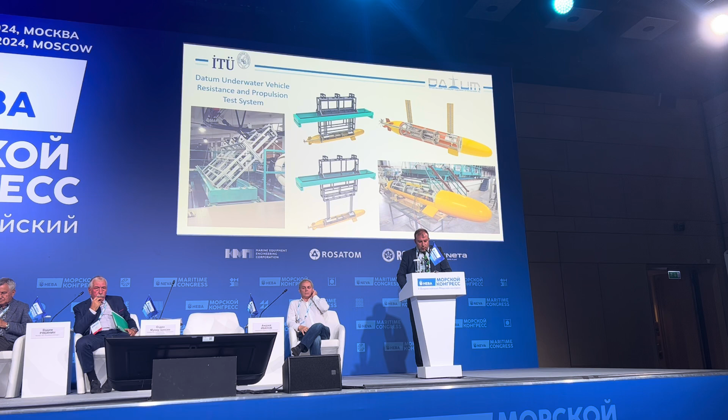One other system was actually our first underwater test system. It was for resistance and self-propulsion tests of underwater vehicles. So we built this for submerged body research, but only for the axial direction. So we measured only resistance and self-propulsion characteristics.

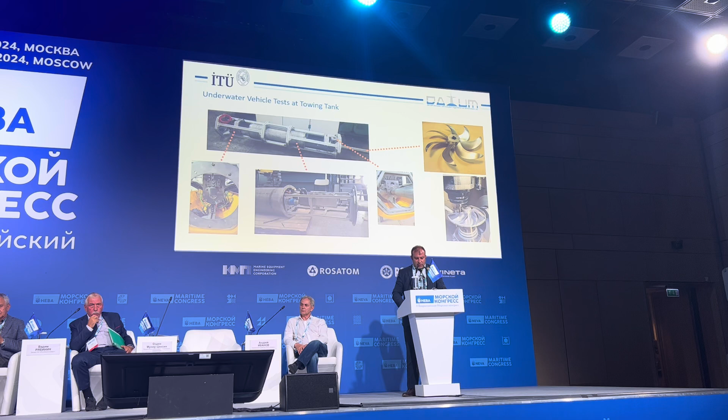This test was done on DARPA SUBOFF submarine model. We got some experience on this model, and it was also a part of a PhD study and was presented in Office of Naval Research conference in Hamburg.

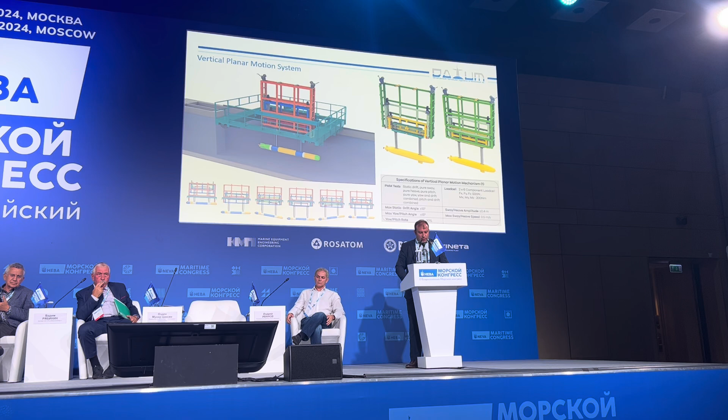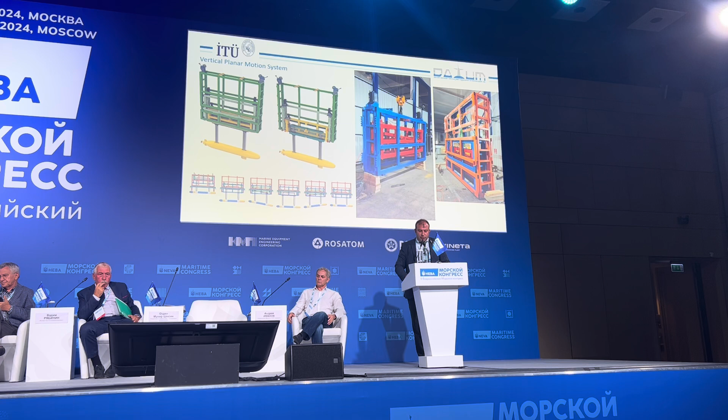University of Technology. And the following system was our vertical planar motion mechanism, which combined our knowledge on planar motion mechanism for surface ships and for submerged body research resistant project. So we manufactured it. It was funded by a defense company in Turkey, Roketsan.

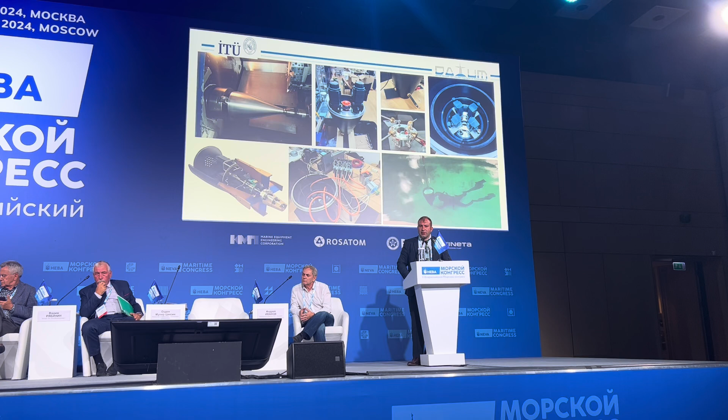So we built also the models, and the models has also their own propulsion systems and maneuvering systems inside. The system was assembled on our laboratory.

We can test models up to 5 meters and has a great amplitude for sway and heave motions. And for pitch motion, there is also up to 14 minus and plus 14 degrees of pitch motion available.

Two years ago, when I was first invited to this conference, this project was ongoing, and now it is finalized and in active service now. So it is the planar motion mechanism, but in the vertical direction.

Also, you generated your pump jet system also on model scale, and then to a commercial submarine and to nuclear submarines. So Russia is quite good at this free-running test technology.

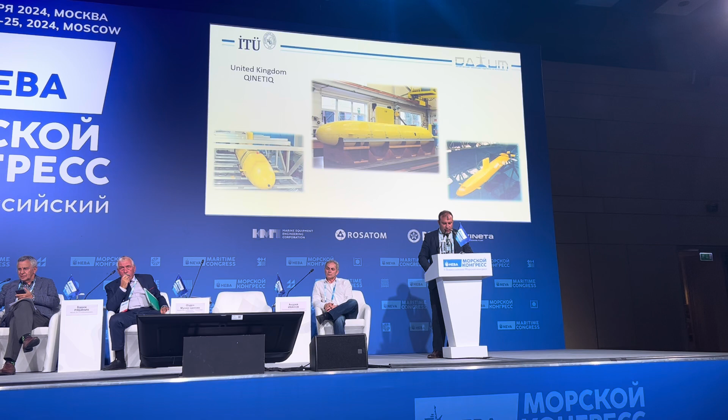In United Kingdom also there is a lab, QinetiQ laboratory. They are doing a lot of free running tests with them. Here you see the free running test of an Astute class nuclear attack submarine.

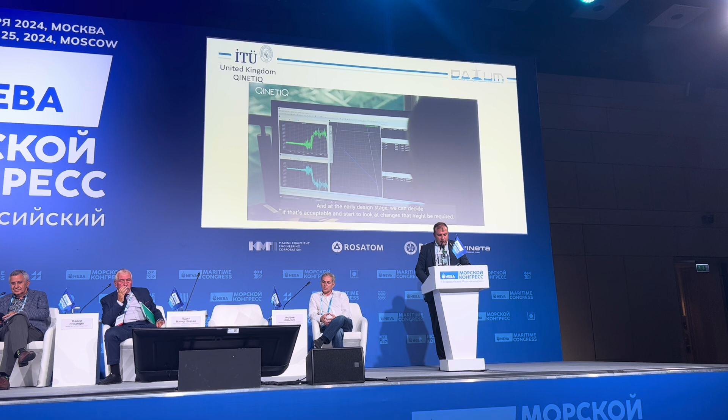As you can know, they need to check the maneuvering properties of a submarine, a newly designed submarine. So they also do have a vertical planar motion mechanism, but the design is finalized before the construction. They build these free-running models and do the tests with them. Here are the general arrangement of those systems.

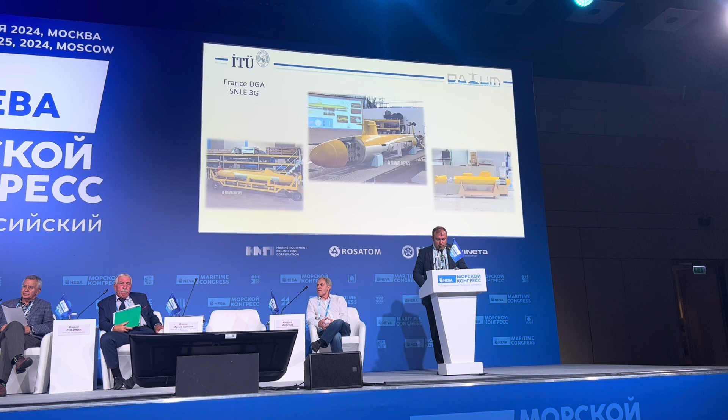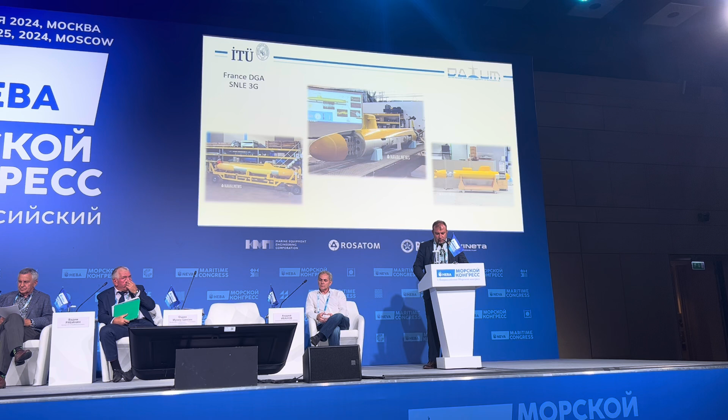France is also doing these tests in model scale, not very large as Russia and United States, but they are doing tests with around 4 to 5 meter models.

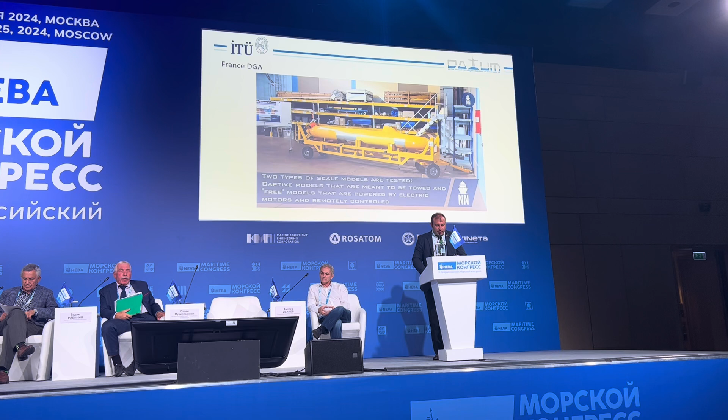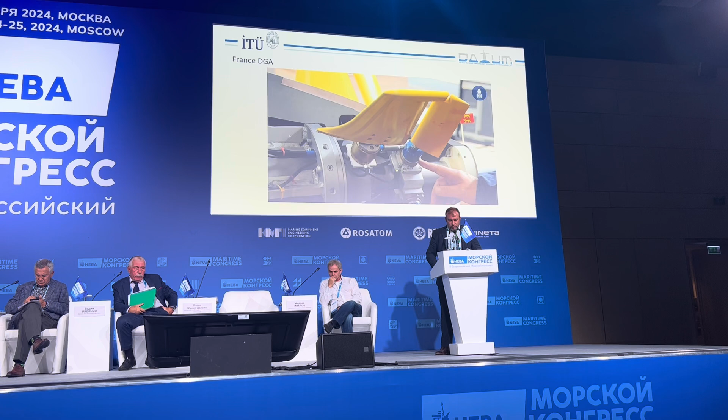Here is their third generation nuclear submarine, the test system of that submarine. System has of course the rudder servo drives to steer the boat, and also inside there are the sensors, a lot of sensors.

Holland is also doing such tests, even though they decided to buy their last submarine class from France. In MARIN, they are doing a lot of submarine tests, free running tests. This is a test of their Walrus class submarine. These submarines already exist, but I presume they are doing some auto pilot software developments. So in order to, before doing it on the full scale, they are working with the small scale models.

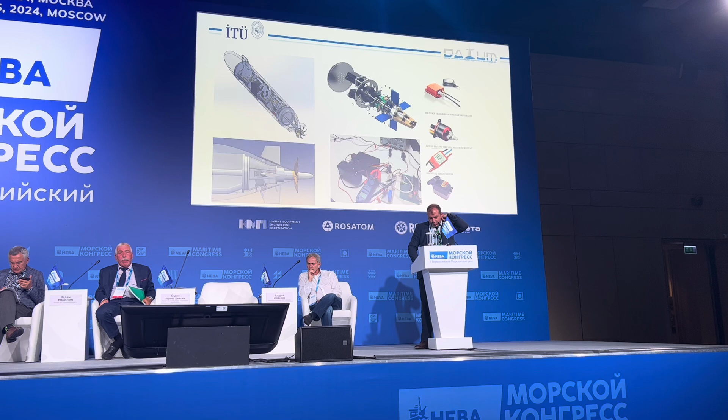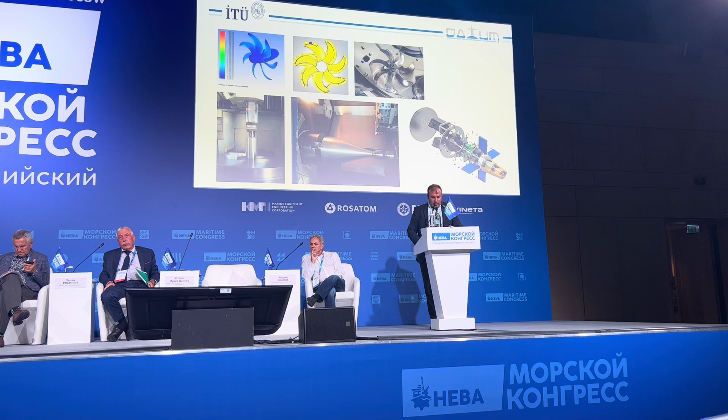And here are our studies. Actually, at first we didn't have much funding, and funded by ourselves. We did some efforts and built this DARPA SUBOFF model.

But now we are focusing on building larger and more with high quality sensors and equipments. Our aim is to produce the system for 214 class, which is the newest conventional submarine of Turkish Navy. We will do the test with them, and then we will continue with our indigenous submarine design, Milden.

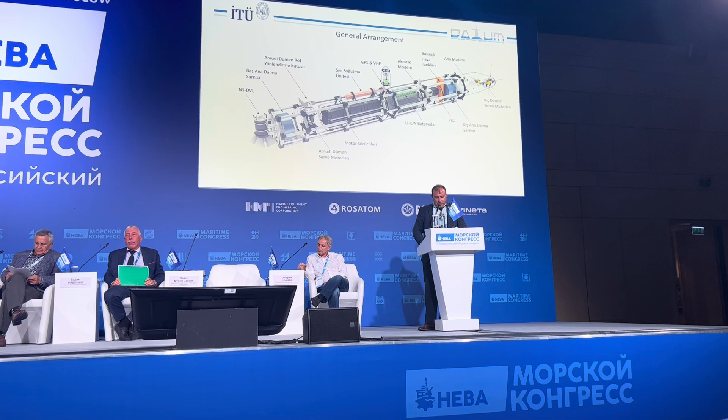So what do we have in the system? We have servo drives for each rudders. We have the propeller shaft, propeller motor, battery systems, and controllers of these motors, and also we need a cooling system in order to cool the drivers.

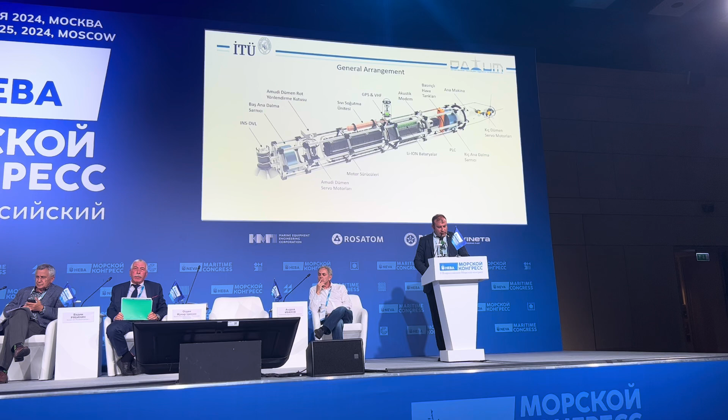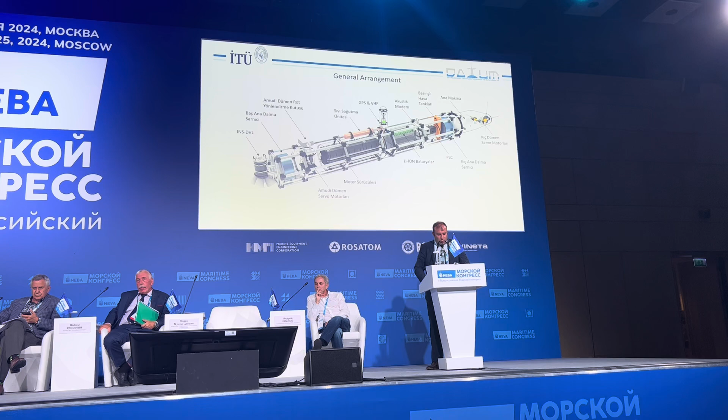And for submerged and surface operations, we have main ballast tanks. And the main sensor, in order to measure the speed and the position and heading of the boat, is an inertial navigation system and Doppler velocity log.

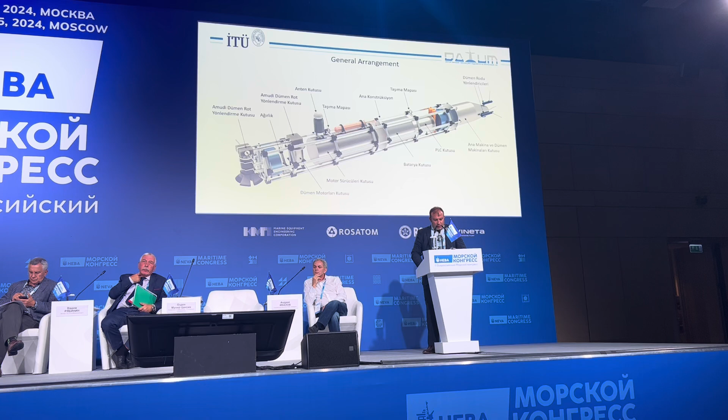So all these equipments are in watertight containers, and it is a modular design. So you can use the same system with different models with small modifications.

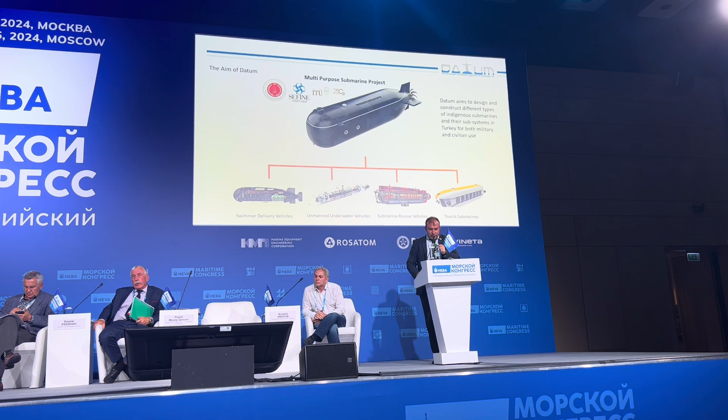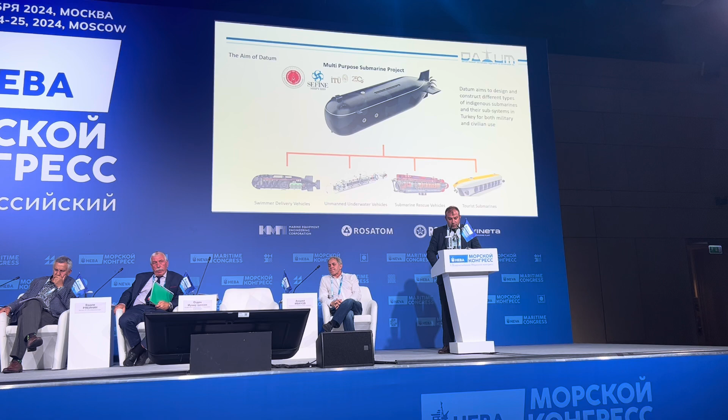And one other project, actually, I'm an assistant professor in Istanbul Technical University in Naval Architecture Department. Also, I'm the chairman on board of Datum submarine design submarine technology company.

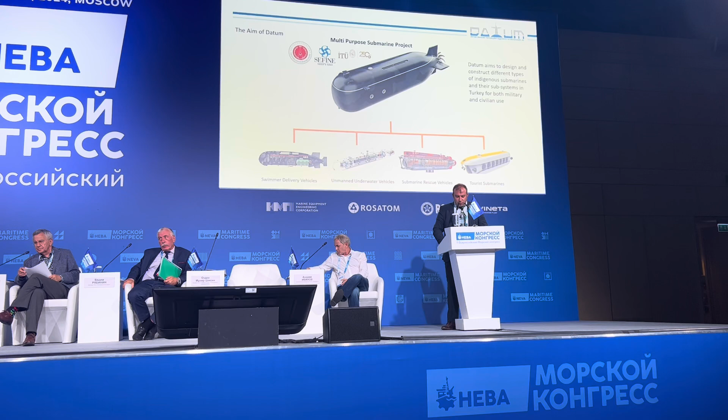And this company, we are now building a 12-meter mini submarine project, which will be a base of our mini submarine designs, and then it will continue with swimmer delivery vehicles, unmanned, large-scale unmanned underwater vehicles, and submarine rescue vehicles, and for civilian purposes, touristic submarines.

We are doing fine right now. We already finished the detailed design of the boat, which is actually the first indigenous submarine design of Turkey before we depend on German designs.

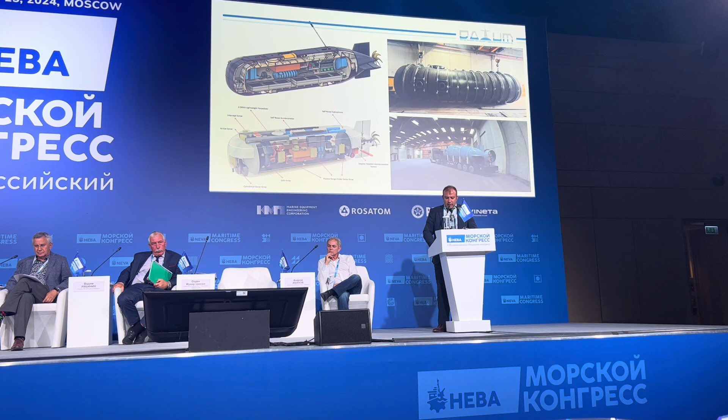The pressure hull is completed, and a lot of equipments are also completed. So we are planning to launch the boat in December. So that's what since last year I was busy with.